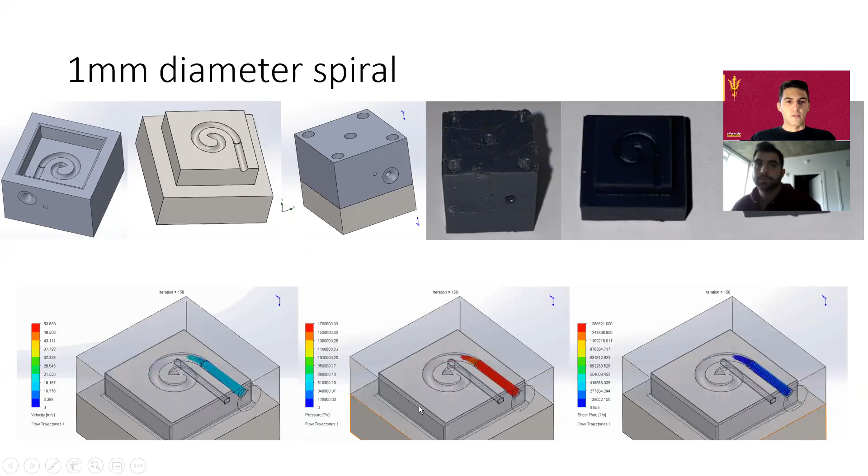And I've done that for many different types of varieties. So this is a 1 millimeter diameter spiral, and then a 0.5 millimeter diameter spiral, a human scale with a human scale clamp, eventually some blood vessels that hopefully will be implemented very soon, some capillary beds just to show ASU pride, like ASU stuff, Pitchfork.

This is my clamp that I use for all the experiments and these injection molds in general. It's modeled after an adjustable wrench. I'm not really going to go over how to do that, there's a YouTube video you can use.

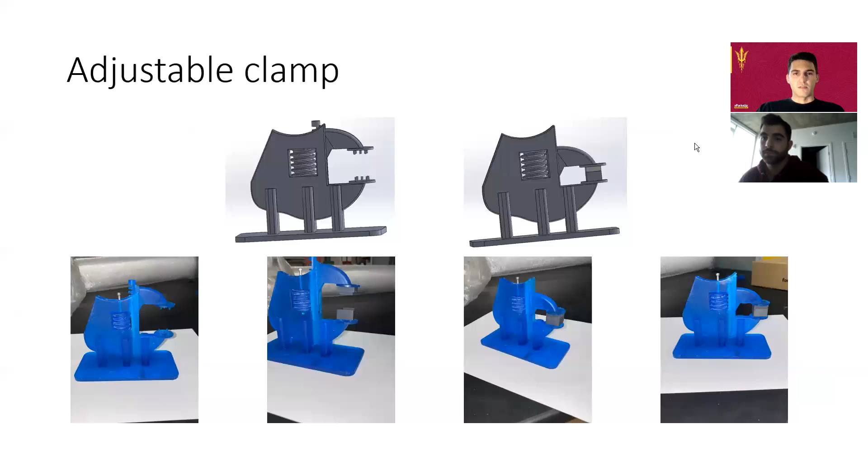I'll post it somewhere. This is another clamp that we'll be implementing pretty soon. It's a hemostat clamp to be clinically translatable. And then yeah, so that's that.

Now let's start into SolidWorks. So I'm using a 2020 version. And it's very similar to most other versions, older versions, but this part is what you're going to start off with.

You're going to use an assembly if you have multiple parts you want to put together. A drawing - I'm going to show what assembly and drawing is at the end of this, but that's basically kind of your schematic of these. Have you used drawing before, Fino?

Yeah, it's very useful. Really good for when you need specifically dimensions and everything. Dimensions and the metrics of whatever you're creating.

Yeah. So first off, whenever I do anything or start something, it's a part. And I just want to reiterate that this first video is very much just showing you what SolidWorks is. I'm not going to go over what an injection mold is, how to make it right now. That'll be in the next video, and now we'll actually have with me Jarek.

His last name starts with a G. I do not want to mess up his name if he's not here, but he's gonna be on for the next one. So whenever you start a print, or let me go through this first.

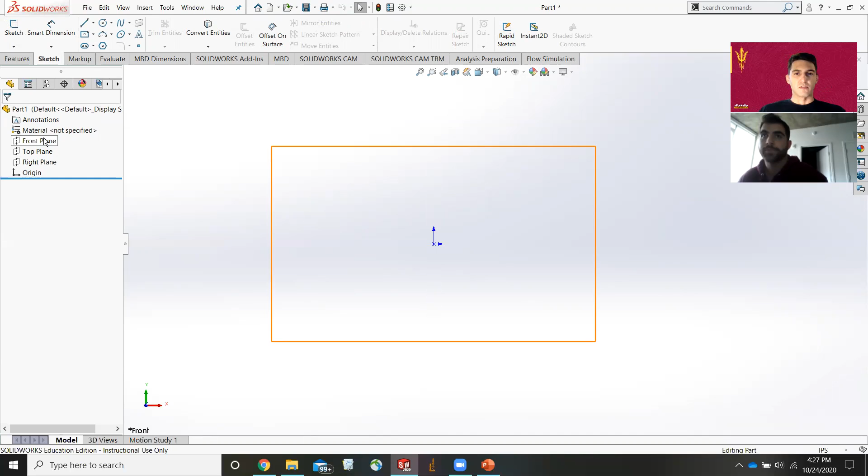So now you can start drawing on this front plane. And I just want to reiterate that knowing how to use planes and sketching on different types of planes is probably the most important thing you can do in SolidWorks.

He's nodding his head because it's very true - if you don't know how to work with planes, you're probably not going to make the desired part that you want. When you're building on a plane, you'll build up, but you can only build in one direction depending on what plane you're using. So if you're trying to make something pretty complex, you need to build in multiple directions, so you might use multiple planes.

There's also a function that lets you create your own plane. It's a little bit more complex, but I'll show that.

You also have this IPS down here, which is the first thing that comes up. If you press it, you can change between millimeters, centimeters, meters, all those types of units. I like to keep it in millimeters just because of all the small scale stuff that we make on SolidWorks.

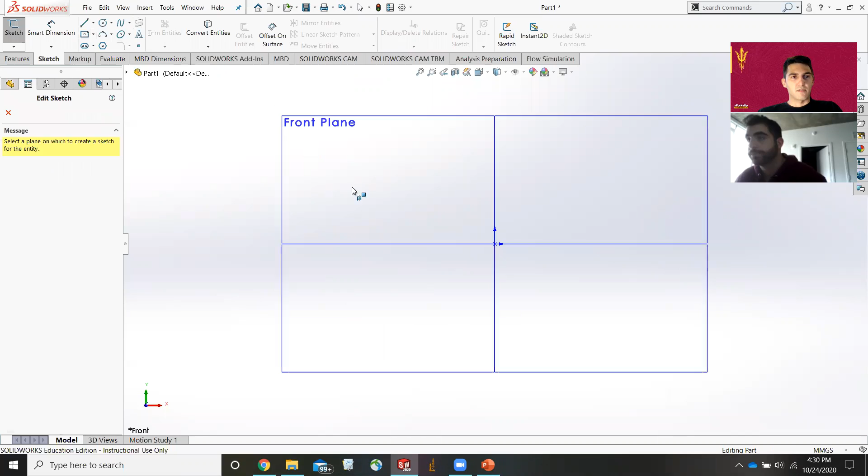But first, let's start off with a square here, a rectangle. So I make this square, and you can come into smart dimensions and make it whatever size you want. So I want 80 millimeters on that one, and I'll do a rectangle, so 100 millimeters here. Now just get out of the smart dimension.

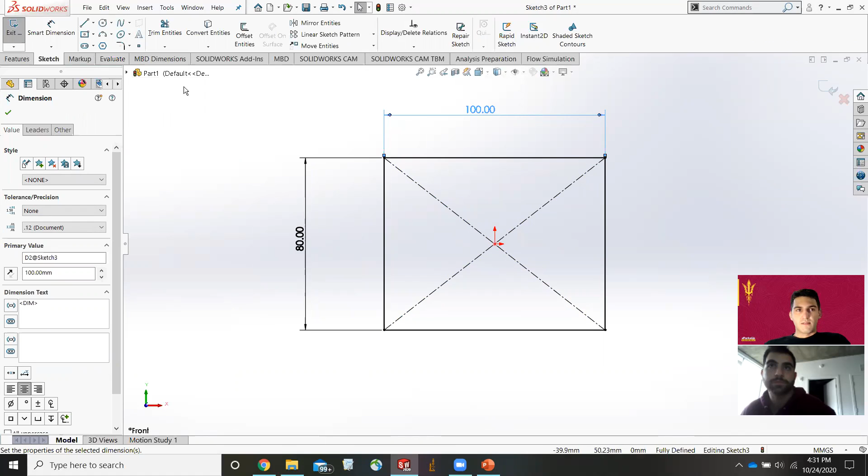And then now we can extrude this, so we come to the features tab. Our features right here have all these different types of features we can use. Right now there's no 3D model, it's just a drawing, so we can't really use any cuts or fillets because there's no 3D model. So we have to extrude it.

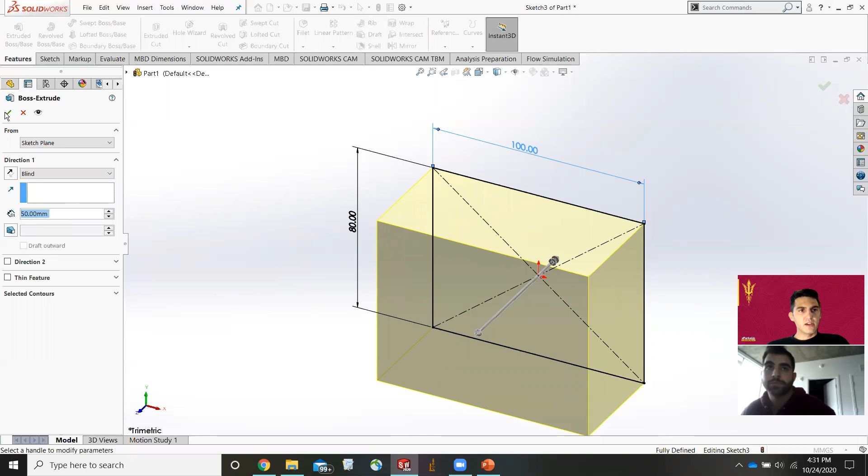This will kind of give you a preview of what it will look like, and you can move it around manually to whatever you want. But if you want something specific, you type it in on these dimension fields right here. I'll say 50 millimeters. Goes there, and there you go - you got a little box.

So what's pretty cool now is you can basically build anything you want off this box. You can fillet - you can fillet the corners, which is this button right there.

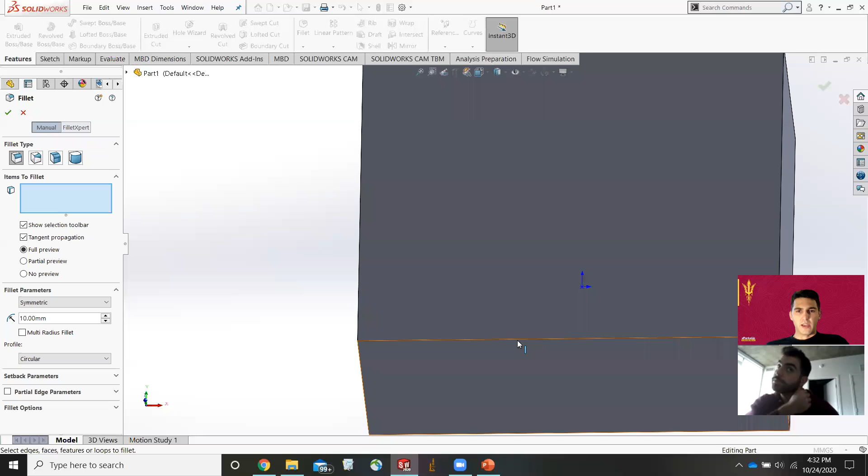There's different types of fillets you can use. You can play around with it if you want. You can take all these sides right here and fillet them, so you have all these edges. You want to show the full preview just to see what you're getting into. You can change the diameter of those fillets, so 5 millimeters, that's what it will look like. So now you have a fillet, right?

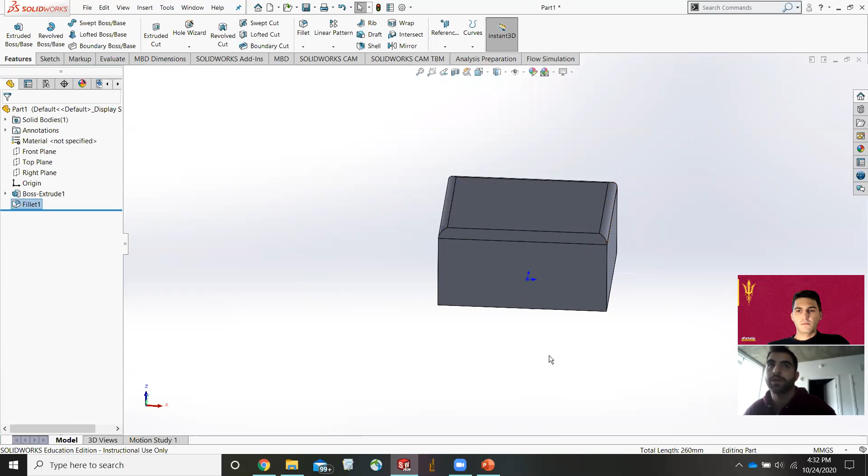If I can add something real fast, just a good mindset when you are creating a 3D structure, kind of how we said planes are extremely important. When you create a 3D structure, each surface, you can draw on each surface of the 3D structure. So you can think of it as each flat side of that 3D structure becomes a new plane, and you can draw and cut into that or extrude out of that as well. That's what happens when you have the original thing. You can do that on most sides, but once you get into more complex shapes, once you extrude off of this main one, it gets harder and you have to use more planes and everything.

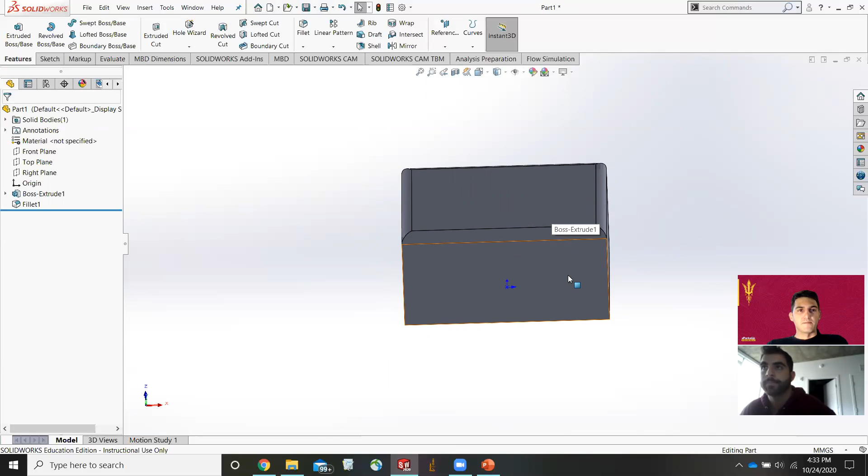It's just practice. But let me show you another cool thing. We can use this shell tool right here, and I'm going to press that. I'm going to show the preview. This is basically going to shell out this inner portion of this box, right? Instead of having to go in there and manually cut it out, you can shell it out with these dimensions here. So how about 2 millimeters of thickness for this box? It shows you the preview, and now you have a box that is shelled out.

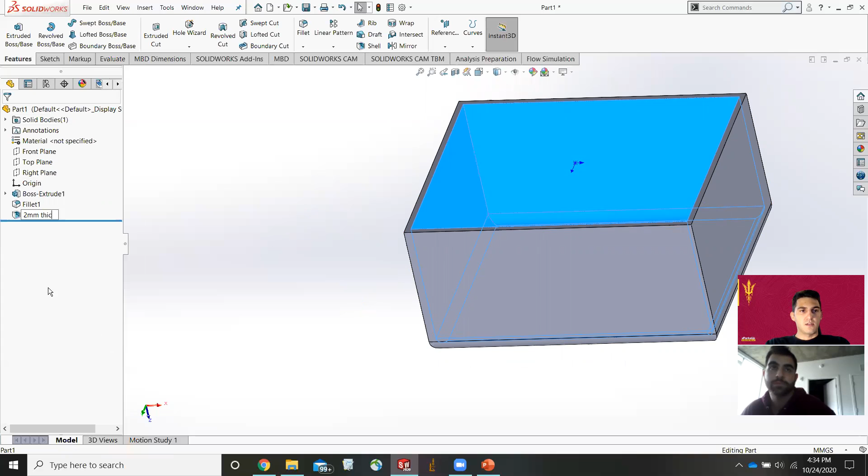And if you've noticed on the side right here, it's basically your history of what you do. You can rename it, so shell 1 is 2 millimeter thickness. There we go, whatever you want. So that's your history. You want to make sure you kind of keep control of that, know what you're doing. But I'm going to erase what I just did, and Control Z is a good way to do that.

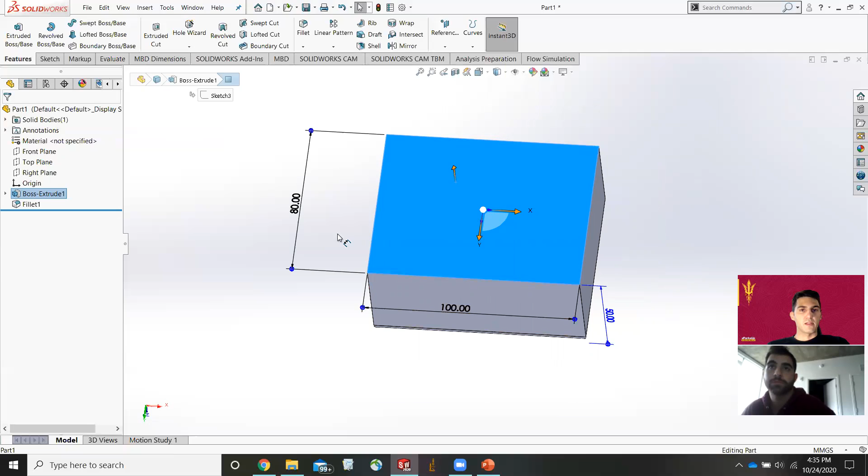Now I'm going to show you how to cut through here. Like Pino said, you can kind of build off of each side by itself. Oh, and also let me show you this up here, a good way to get a straight on view instead of having to roll it around with your mouse and try to get it as straight as possible. Yeah, to specify that as well.

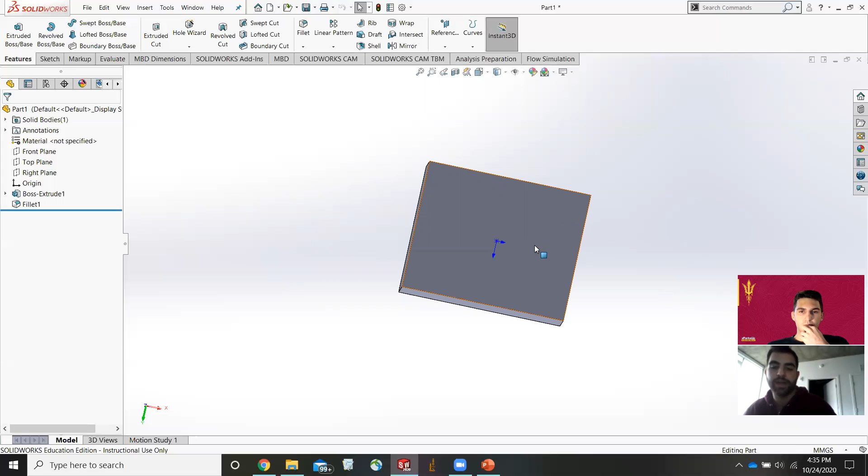Your angle you're looking at is extremely important, and also with your mouse, you'll probably notice Alec was free form, kind of moving it how he wanted to. You do that by, at least with most mouses, clicking the scroll wheel and then moving the mouse, and it allows you to move the object around. That box basically allows you to freely choose what perspective you want to be looking at your 3D model at. If you're using, I highly recommend using a mouse, but you can get away with using a trackpad, and I believe if you just use the arrow up and down and left and right keys, it lets you do the free movement around, I think.

Yeah, exactly. And then when you want to move back and forth, like in and out, you just scroll your mouse, just like you would going down on a page on a document or something.

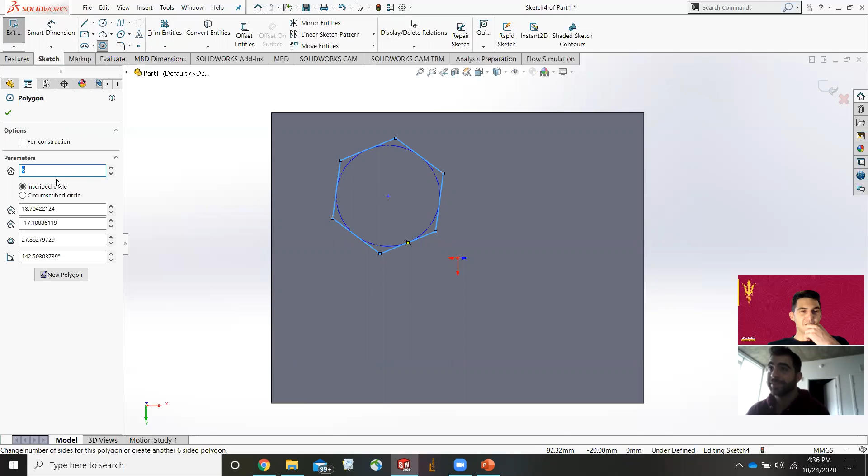So here, instead of using a regular circle, I wanted to use a hexagon. What is this number? I can't think of numbers right now. What is the six? It's hexagon. Yeah, it's a hexagon, right? Yeah. And then 7 is septagon, 5 is the pentagon. Yes, okay, I forgot. Well, we'll stick with hexagon.

So you can change the number of sides with this. Septagon, octagon, it's pretty cool. We'll do an octagon, so now it's set up here. Then we can go to your features tool. We can do an extruded cut that will go through this, or we can adjust it to how you would want to extrude it. So let's say we'll do 30 millimeters.

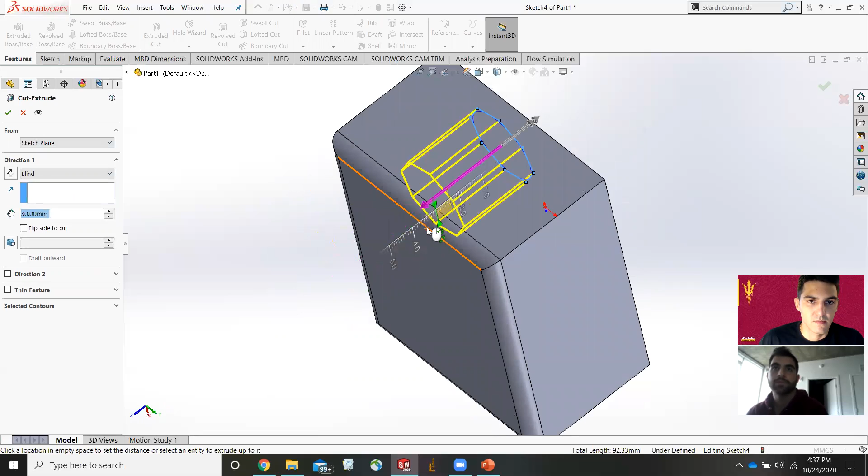We can do it blindly, so it's kind of just you taking it and doing it itself, or you can go up to the vertex, which is this plane right here, like that. Or there's other things you can do, like offset from surface, which would mean you just take it off the surface into something else. I'm not going to worry about that, but play around with it if you want.

30 millimeters cut. You now have an octagon hole in your box. Cool.

Now, is there anything else basic I should show? I'm gonna erase this.

I was just gonna say another short kind of mindset thing. I know there's so many different options, and it can be overwhelming to see all of them, like swept cut, lofted cut, boundary cut, fillets, draft, shells, and all that stuff. But the important thing to keep in mind is the main two things in SolidWorks: it's basically the whole program is extruding and cutting. All of those are essentially just shortcuts for cutting and extruding more accurately, to get exactly what you want.

The swept cut and the loft cut, that'll be very much used in actual injection molds, which I'll show more. So I'm not going to go heavy on it for this, since I'm going to show it a lot more in the actual injection molding videos.

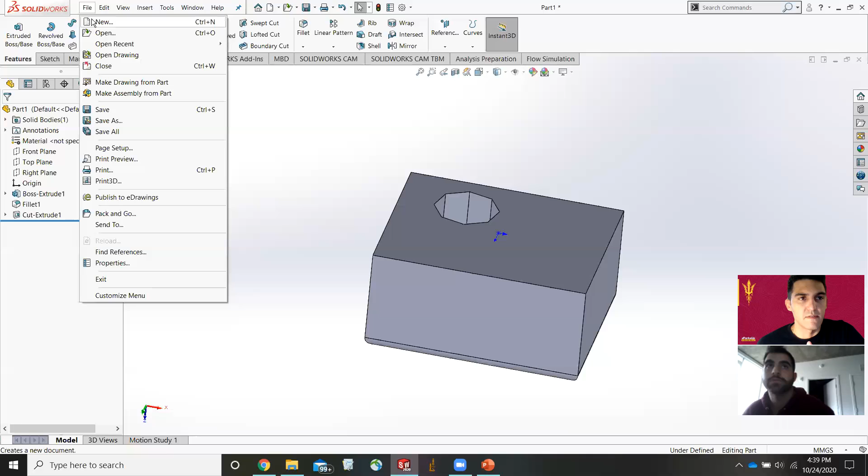I'm going to make another hole just because. Now we have an octagon, and I don't know the size of this octagon. Let's make another hole real quick. Fino doesn't know why, but I'm gonna do it just because.

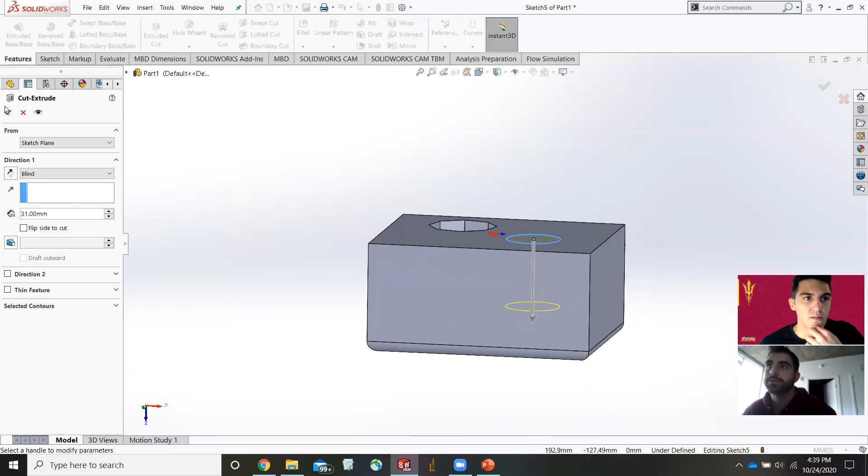And there we go, we'll do 31 millimeters. Remember that, and I also forgot to mention: always remember to use smart dimensioning if you want accurate measurements.

So let's do 25 millimeters, and then let's do an extruded cut to 31 millimeters. So 25 and 31, remember that. 25, 31. Cool. Yeah, this was nothing planned, by the way.

This is all improv. It's all improv, all improv. Yeah, exactly.

So let's do this - let's do a new part. I need to save this one. Save as... designs, and I'm going to do practice part.

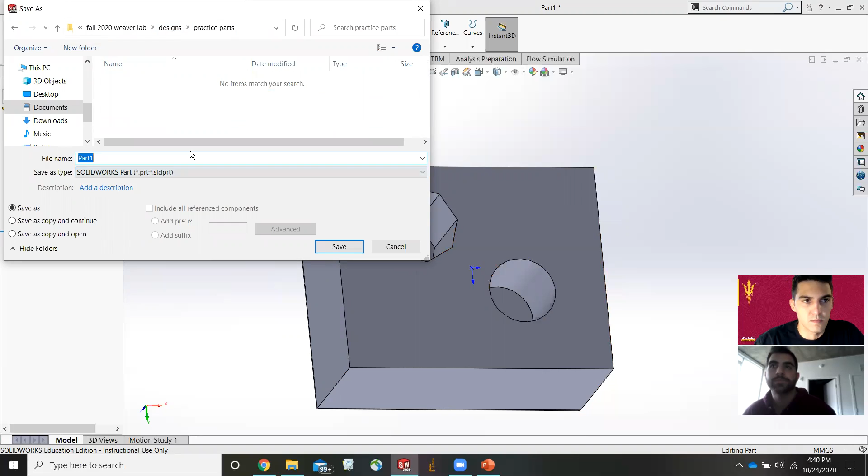Oh, I know what you're doing. I'm gonna show mating with a new part. So I'm gonna again select new part, not assembly.

Okay, so new part, so we're gonna sketch. This time I'm going to actually sketch a center line, which is probably one of your best friends as well, is knowing how to use a center line.

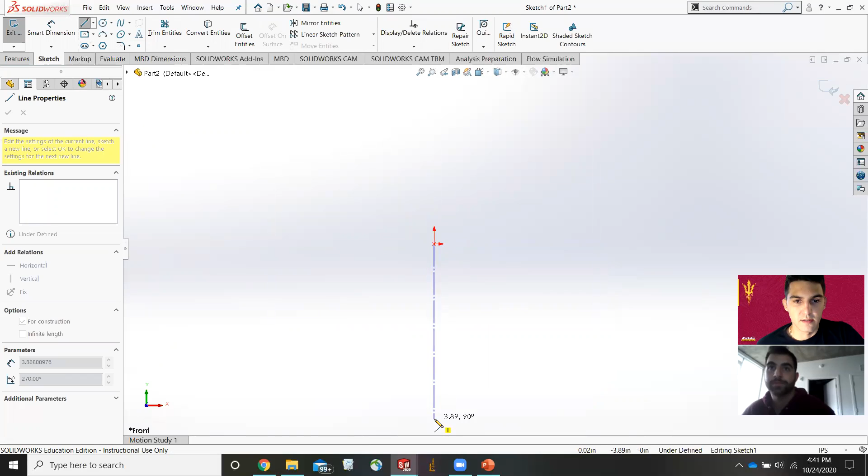And there we go, let me change this to millimeters. When this goes gray like this, by the way, all you have to do is double click and it will come back so you'll be able to work with it. If you press X, it will exit the sketch. If you press this other option, it'll also exit the sketch, but it will just make it gray, so you won't be able to really work on it.

I didn't know that. Yeah, so double click to get it back into sketching mode, and then I'm going to show you actually how to mirror something.

You know what's half of 25? That would be, oh my God, 12.5. 12.5. And then, so this is what I'm going to show you guys, which is pretty cool, I think.

This is an extremely useful tool for sure. Symmetry is pretty much important in almost every single device - I mean, 90% of devices there's going to be some symmetry you need to work with. So the mirroring tool is very, very important. Let me just show you the basic way to do a mirroring tool.

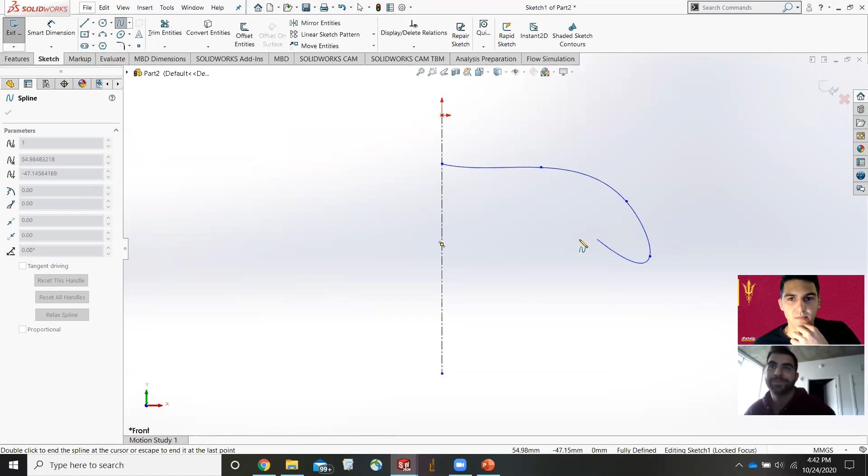So let's take my spline - you know Fino hates splines - and kind of make a weird shape. So how does that look, Fino? I don't know what it looks like. Kind of looks like a ghost, like an upside down ghost with eyes right here. It's October when we're recording. Yeah, exactly, October 24th, so we're going for spooky.

Yeah, so this little screen sharing thing up here is in the way, I can't really see what I'm doing. So I'm exiting that sketch - just kidding, I'm gonna keep it in. Why isn't it doing this? See, I told you, splines.

Hold on a second. Okay, this thing up top is so annoying when you screen share. I can't see what I'm pressing.

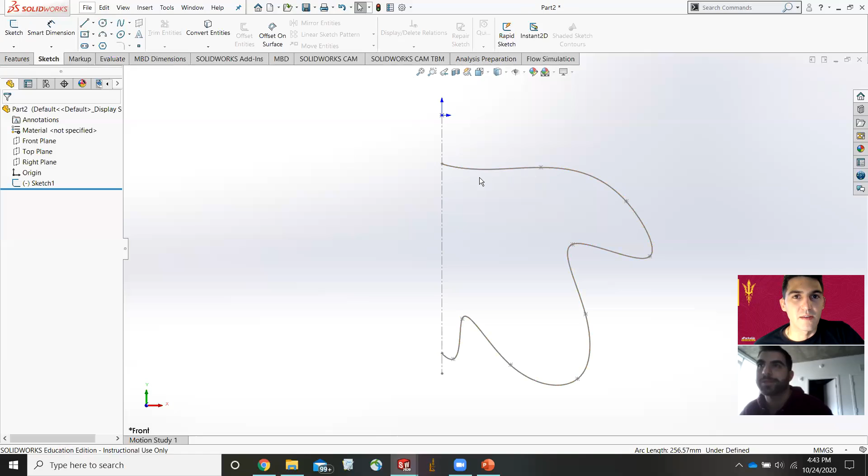Let's mirror entities. Here we go, we mirror this about this line. See, now it looks like a... what does it look like? A bat? No, an ugly butterfly, a fat thick butterfly. Anyway, so you can mirror. If it's something complex and you don't want to freehand matching the other side, using this mirroring tool actually helps a lot.

So we have now a completed thing that you can extrude, just like that. Does that make sense? It's cool, now you can work off that.

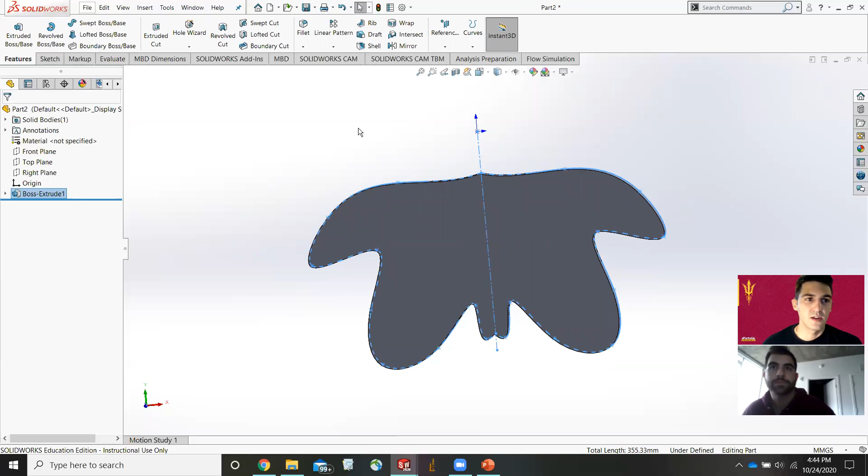So again, I'm going to go backwards and delete this. I'm going to show you something that you don't have to do, but it's pretty cool. It's a revolved boss base, and for the mate we're about to do, you don't need to do this complex thing, but we're going to do it because it's fun.

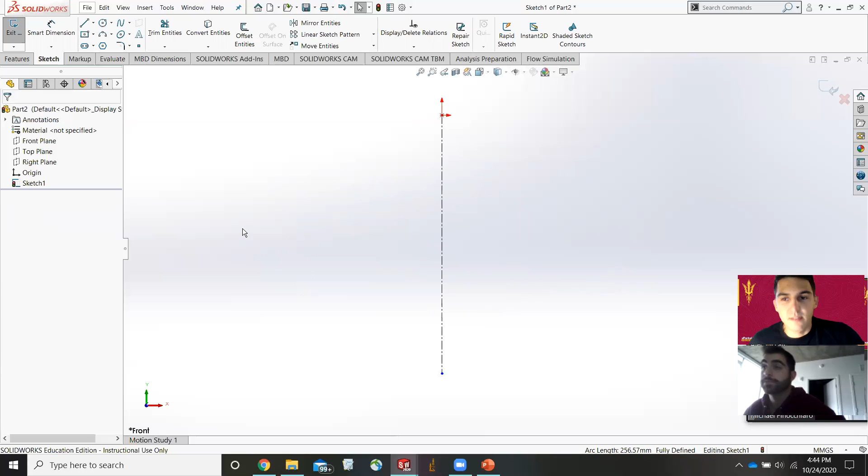So now we're going to take our line. What was the diameter? It was 25, right? 25, and the height was 31. Okay cool, so I'm going to go here, just bear with me. 25, I'm going to do 40. So then, smart dimension, do 40 millimeters, and then I'm going to go down.

Sorry, I'm bugging here. And then I'm going to go back across. Actually, I'm going to make another one. One cool thing about Solidworks is it kind of tells you where points are when you're on another line, where to start, and it'll be accurate, so you don't have to worry about measurements as much. But here we go.

So now that's over. Smart dimension, 12.5, right? Yeah, millimeters. Cool.

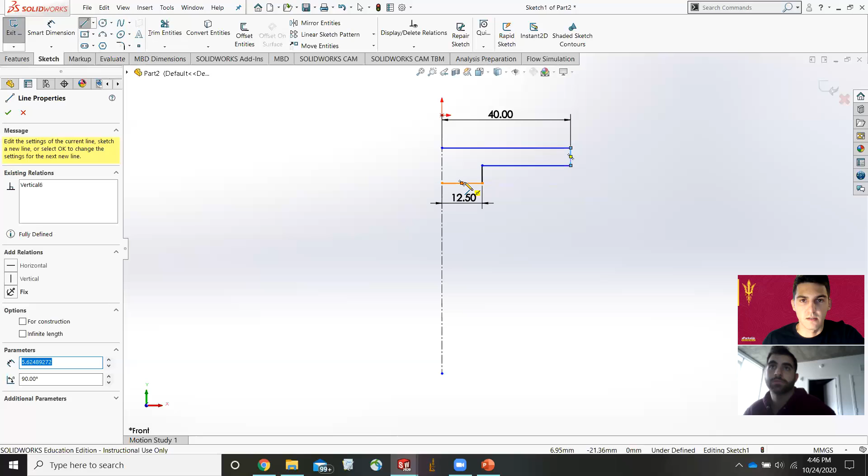And I'm actually going to delete this real quick. And actually, I'm going to delete this again. And make this 31. 31, right? Yeah, 31.

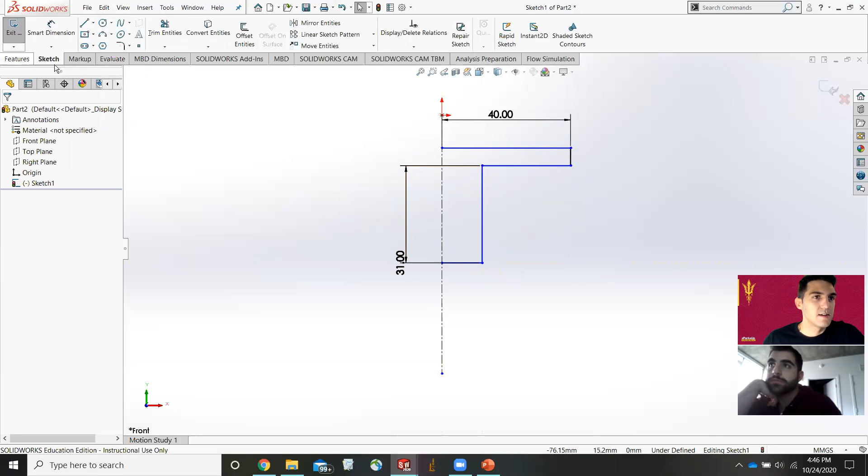So this is pretty cool, I think, hopefully you guys like it. Is this revolved boss base? And then we actually have to... oh yeah, there we go. So look at that, it's like kind of a lid, right? It revolves around this sketch around that center line. So that's exactly what we want.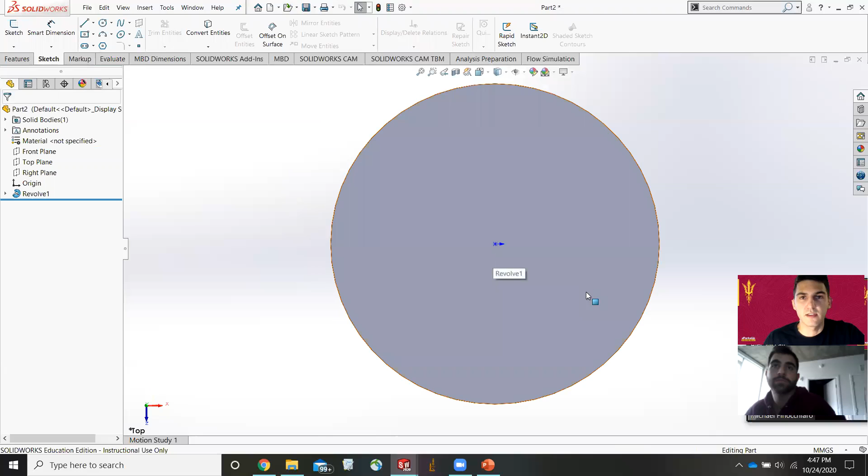Pretty cool, right? So now we can actually build off of this plane again. Let's do this, I'm going to make a sketch on here. If this is getting too complicated for people, let me know. No, I think everything has been pretty easy to follow.

Okay, so I'm going to sketch on here a circle. Okay, bear with me, bear with me. And then I'm going to draw a center line here to here.

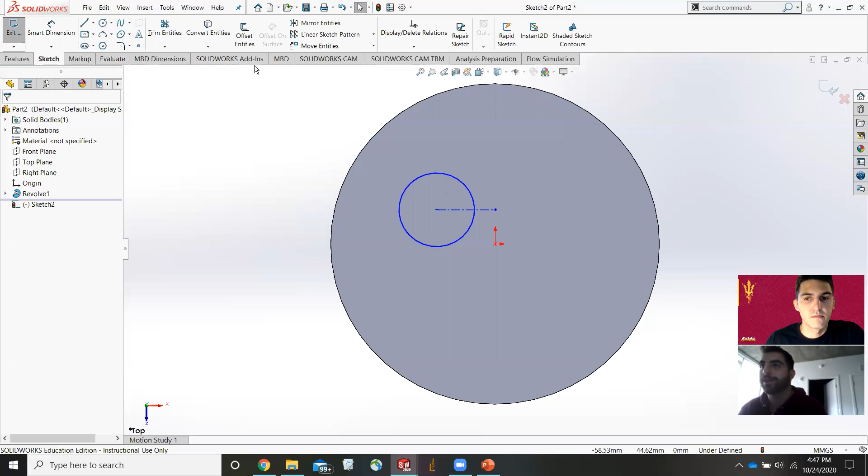Quick note, if you're having trouble figuring out why your thing is not extruding, check for extra lines that could be going into your 2D shape. They might be hidden, something you forgot about. Just check for that, because you need a completely enclosed 2D object without anything going in or out in order to properly extrude. Just wanted a quick note.

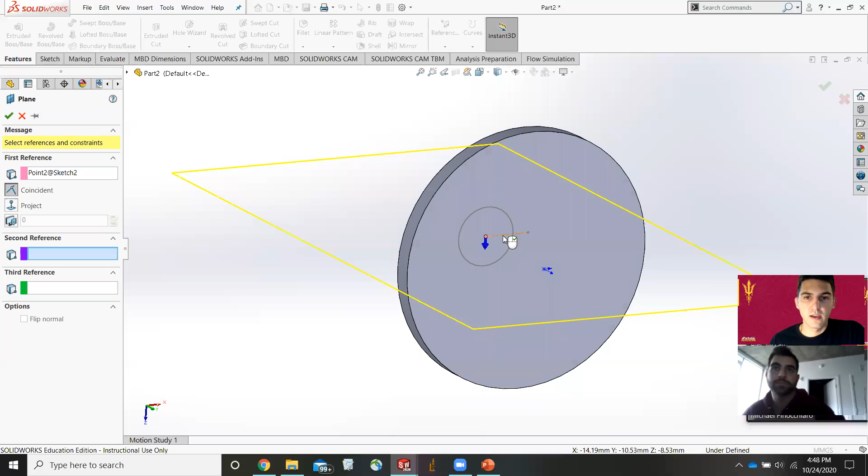So now I'm going to make this, this will make sense of what I'm trying to do with this line real quickly. Right now I'm not going to exit the sketch, I'm going to press that button to make it gray, so I'm able to hit reference and go to plane. You need three different references to make a plane; I'm going to use two, using this point and that point to make a plane. See how it's making it right there in this plane. You can make it bigger or smaller, whatever you want. But what I'm trying to do is make a line.

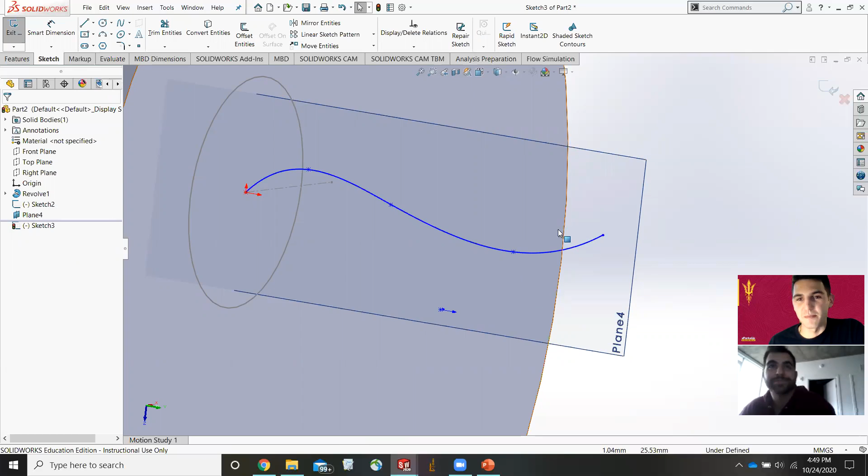Let's use our handy dandy spline tool again. How about that, another spline tool for you? You don't like the spline? I don't usually like spline, but whatever. You use the spline, it's fun, I promise, when you're actually good at it. I love making the blood vessels and stuff because you don't have any measurements, you can just freehand it, it's pretty fun. The artistic juices are flowing, you gotta have the creativity going. I want to make another plane.

Like I said, we should make this a podcast, doing SolidWorks and conversations. I bet that'd be fun for engineering students at least. Yeah, there's a lack of good engineering podcast content out there.

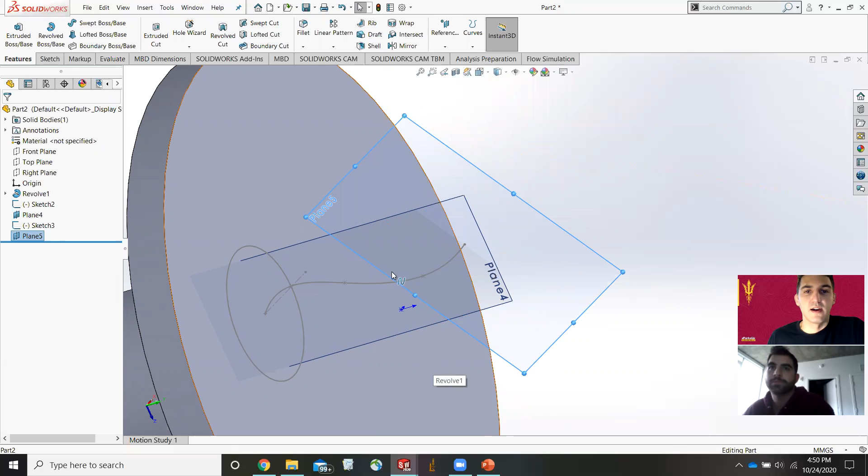So you see how these planes are kind of becoming more and more planes, and that's what you need when you're making something that's extruding off and you want to build something. Basically, you might not have a flat surface to build off of, like this how it's angled - you won't be able to build something off of that. So you need a plane, and you can press on whatever plane you want.

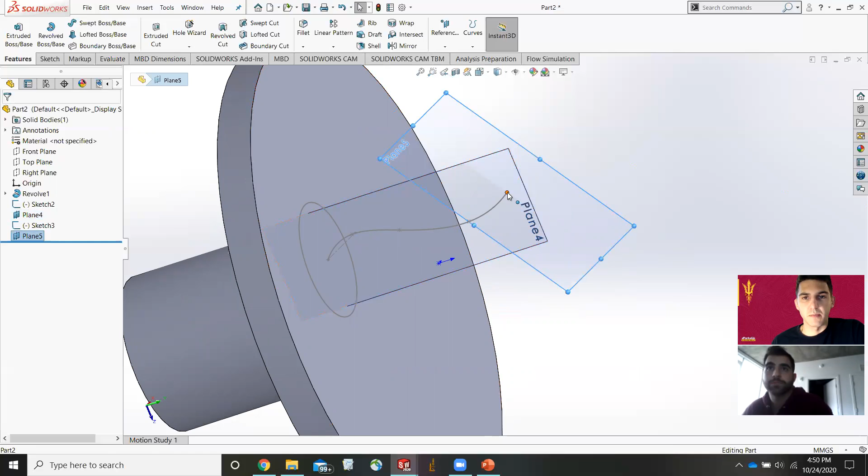Right now I want to build off this plane because I want to build off that dot. I'm going to do a sketch. Let's do a square. How about a square? Does that sound good, Fino? Sounds great. Love squares.

Anyways, I had a joke and I forgot what it was.

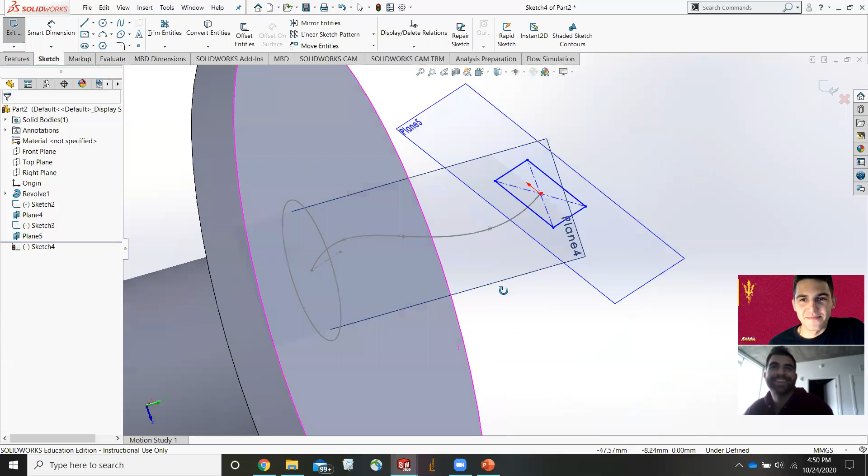Anyways, now we're going to try a lofting. So you don't want to do a cut because we want to build something, right? So we want a lofted boss base. Profiles.

Okay, I'm going from this square to this circle. So you've got to press both of them, this square to that circle. You see how it kind of goes - you're going from this square shape to that circular shape. It's not really compatible with this line that I made, this spline.

So we have a guide curve that I'm going to press right here, and I'm going to hit this line. Look at that - it looks weird because look how it's off-centered like that. So there is a way to fix that.

Start and end constraints - I think it's around here somewhere. Well, you can figure it out. That's one thing about these, it won't be right in the middle, and you have to adjust it.

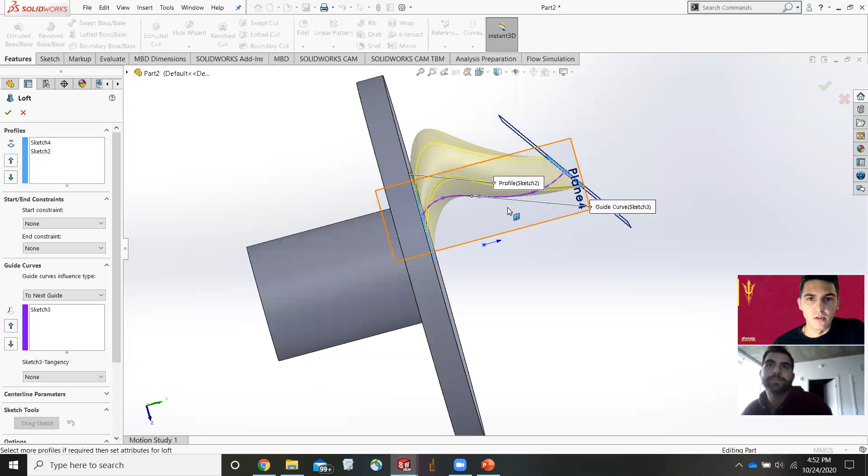Essentially, you're using that as a guide to that line, from one to the other. No wait, just kidding, no, kind of. No, next edge, next. Somewhere in there.

As you can see, there's a lot of trial and error in SolidWorks, and you just kind of got to play with it. But we're going to do this.

Intersect the section plane. So sometimes you get errors like these where it doesn't even let you build it because, like Vino said, spline is hard. It works when something like this isn't complex.

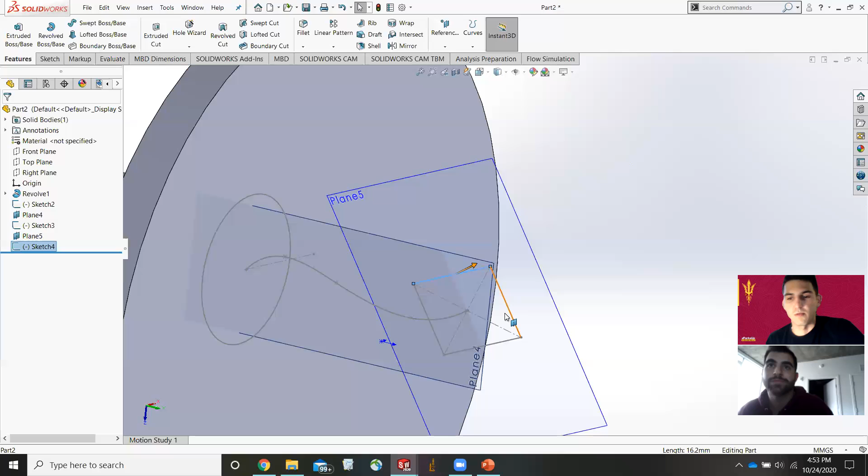So I'm actually going to take this square off because I just want to show you that it works. It's pretty cool. I think an actual regular circle should work.

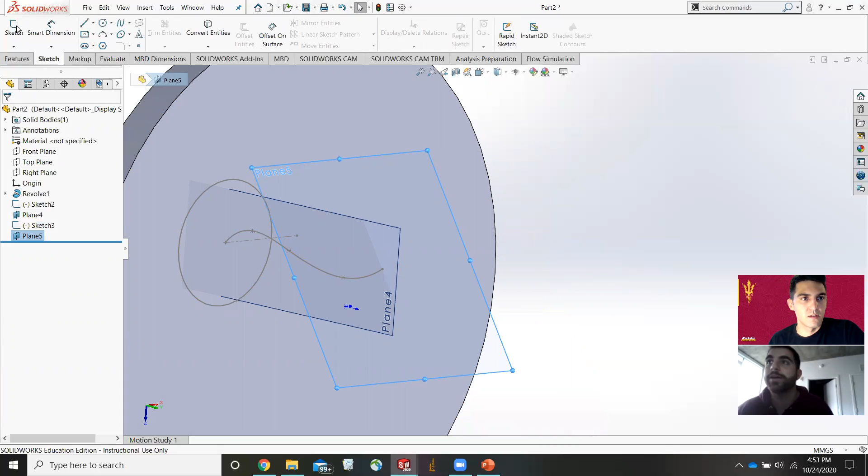Oh no, you built that on the wrong plane. What happened to my plane? There it is. All right, make sure you're on the right plane. Also, if a plane disappears, you can always go up to the menu on the left side, find it, click it, and then it should highlight it on your actual thing.

So again, let's try this profile. Circle to circle - look how it kind of does that. Now our guide curve, this should work better just because... maybe not.

So what are you trying to do? I just want to see if that works. Because the spline is technically getting in the way of it, or? Yeah, something like that, it's just being annoying.

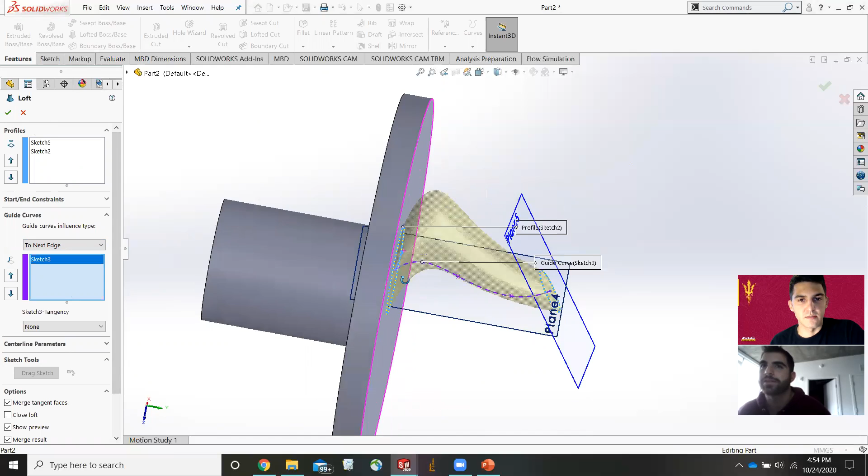But this is pretty cool. I apologize for this one not actually working. The essential purpose of it is it allows you, if you have two 2D shapes and you want to connect them, you use that tool and it will extrude and connect both of those shapes.

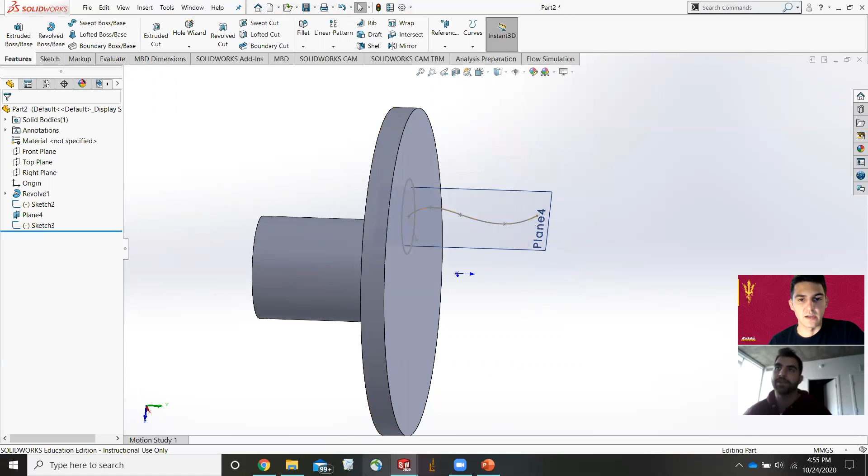And that's how I made these blood vessels, like I said. So it is possible. Oh, it's hard to see. In here too, same thing.

We're using lofted cuts though. Yeah, I was doing lofted cuts. It's the same way, so that might be why, maybe. It could be. But lofted things are definitely interesting because you have a lot of parameters that work together. It worked well with the lofted cuts on these injection molds.

So anyways, let's do our mate and we'll call this one a day. How about that, sound good? Sounds great. Am I missing anything on these, do you think I should go over anything else?

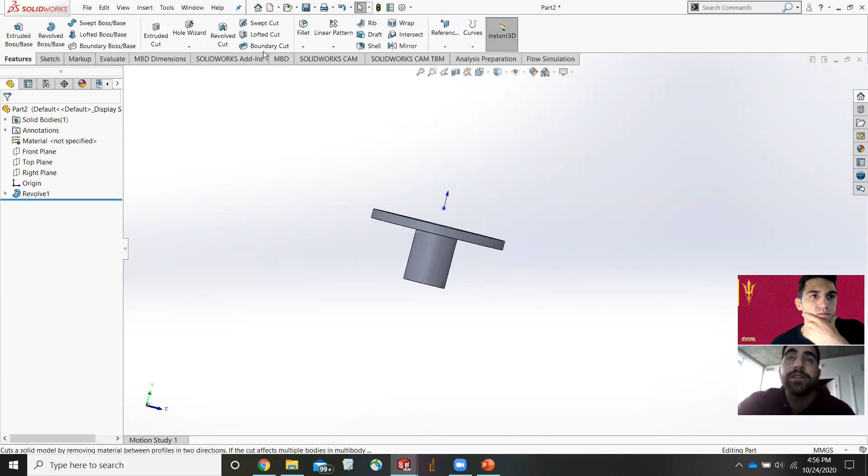No, not really. In terms of basic things, there's still a lot I've never used before, like Hole Wizard. You don't have to use it, but you can. Swept Boss/Base I've never really used either. Oh wait, actually, that's what happened. I've got to do this now. I've never used it before, so I couldn't tell you.

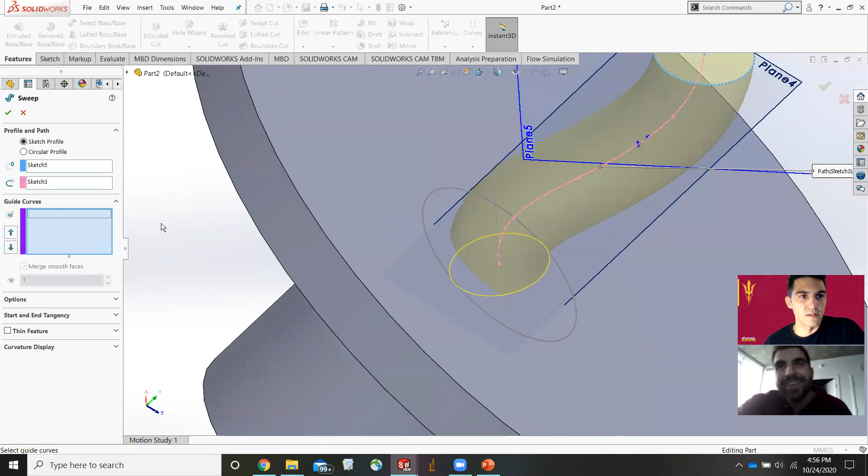Oh, that's interesting. So there's a way to connect that with that, and it's probably something for like a flush mate or something. Oh yeah, let's just do that. How about that?

Again, like I said, a lot of trial and error, or like Theo said, at least a lot of trial and error. Let's try it, let's do this.

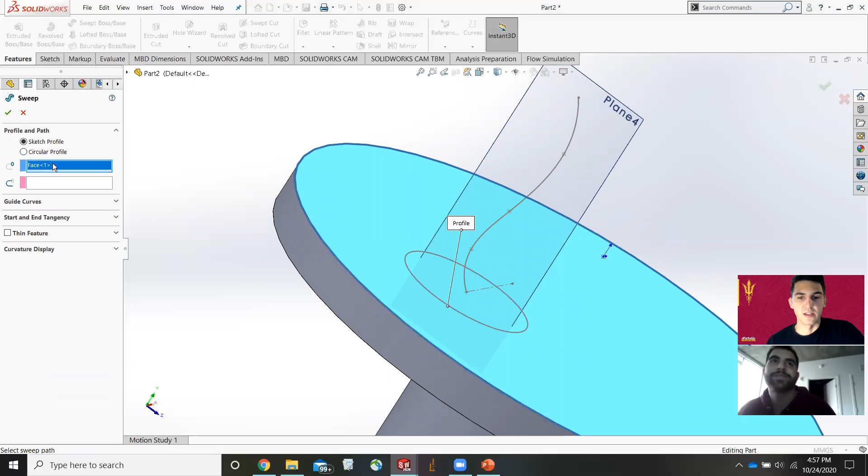One last thing, I promise. This is what you have to use for building these injection molds. By the way, I wasn't going to get into this today, but we're here now, so it's okay. I bet they don't mind, they're probably watching us at 1.5 speed right now anyway.

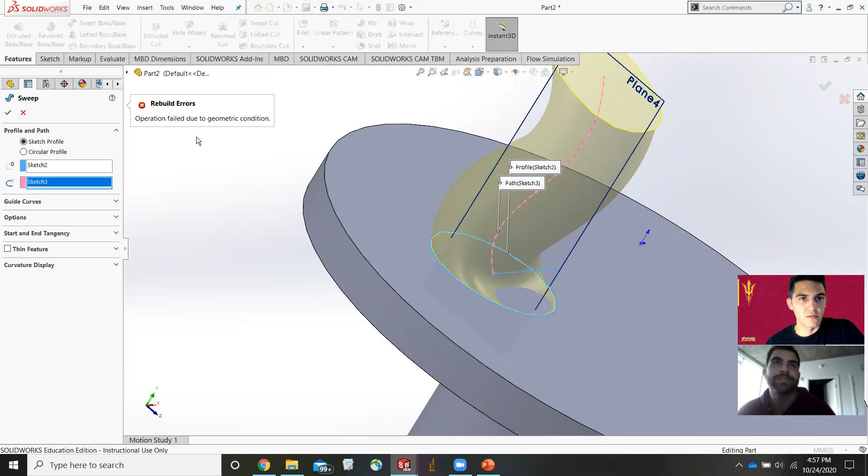Why is it not doing this? That is very weird - operation failed due to geometric condition. Oh, I think it's because of this thing right here, it's because it's going in. Yeah, whatever, but I'll show you in the next video. It'll be fine.

All right, let's go on to the assembly. Like I said, this was all not planned, I had nothing really planned for this, it's just going. Okay, let's save that.

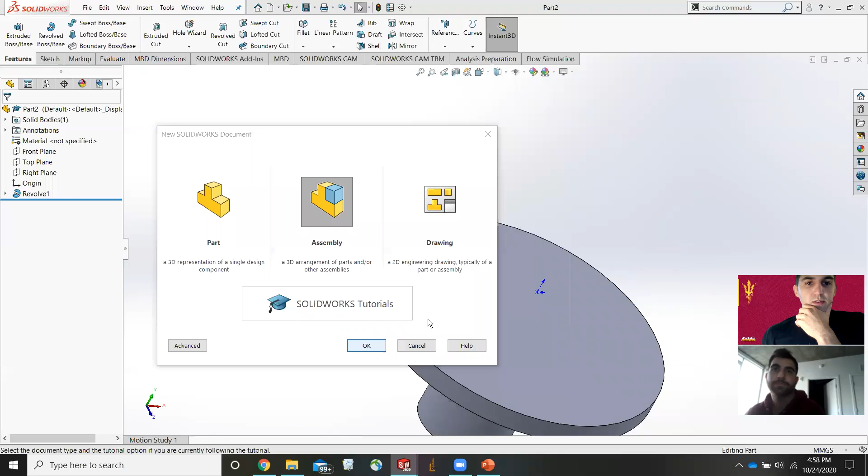Part 2. Cool, now we're gonna go to File, New, and click Assembly. Now it'll be a little different.

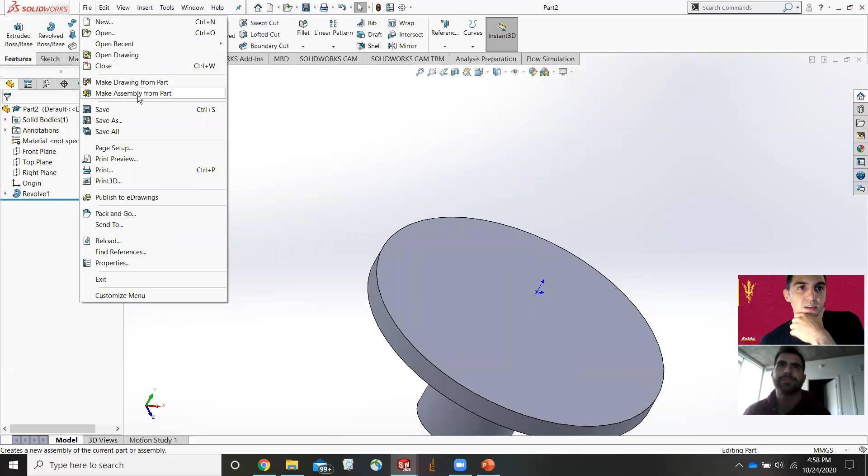Wait, where is it? Did I click Assembly? No, I guess I clicked Part on it. My bad, because you wouldn't have Evaluate and those other options unless you had. So, Assembly - or you can do this: File, Make Assembly From Part. That's also easier.

So it'll change up a little bit. Now it'll say Assembly instead of Features or whatever it was. So now we have Assembly right here. You want to go to Insert Components, and we have Part 1 and Part 2. You're basically just going to drag it out. Got our holes right there.

Now I'm going to insert components again, going to Part 2. So remember, our front plane was built on this one right here, or somewhere around there, and that's why they're oriented differently.

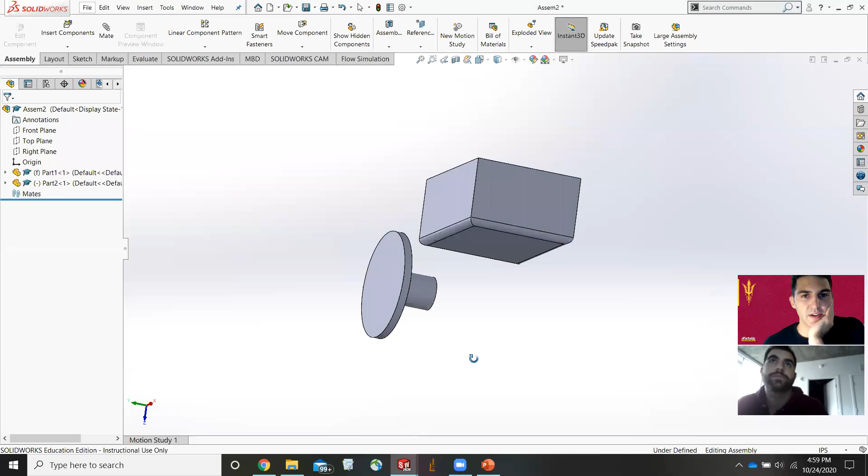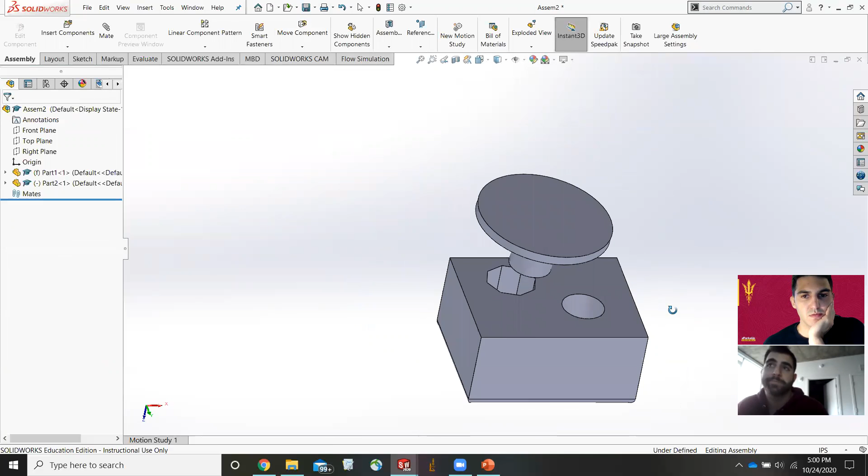But you go here to Move Component, you can rotate the component right here, just like that, to make it line up a little easier. Otherwise you can just move the component itself, like up there. Now I want to put this in that hole - it's called a mate, you got a mate.

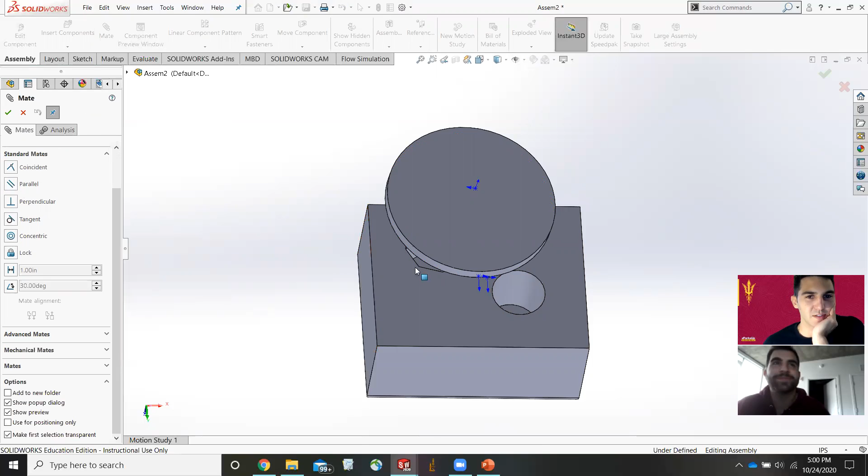Probably not the most PG thing - yeah, I was gonna make some jokes there. I think I'm not gonna make any jokes about it, but who knows who's gonna watch this. I don't know who's gonna watch this, you don't know if you're gonna watch this.

So yeah, okay, we're going to Mate. Well, what's going on here? There we go, so we have our mate selections. I'm gonna press this line, or this circle edge - they're called edges - and then this one right here. Look at that, they match up perfectly, and now it's basically a lid.

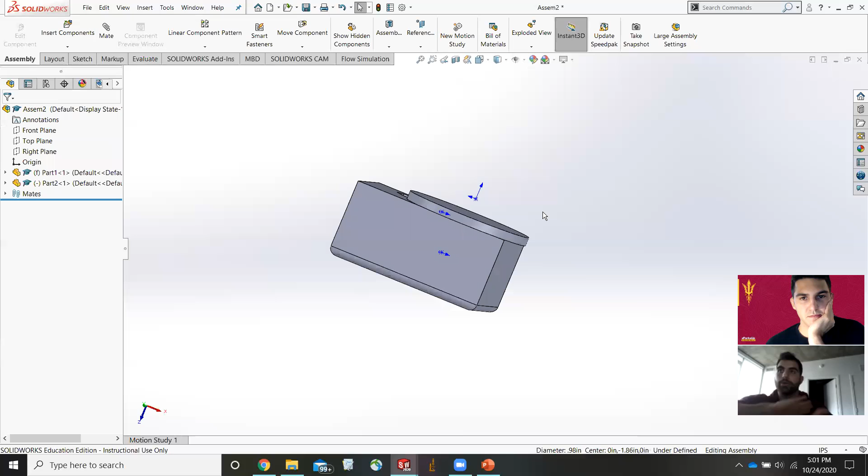You can do it multiple times with many other things, but right now that's the very beginning. You can do that with not only edges, but also with the whole flat plane as well. When it's not explicitly a hole you're trying to mate, and it's two flat surfaces, you might need to use not only the edges, but also the plane itself.

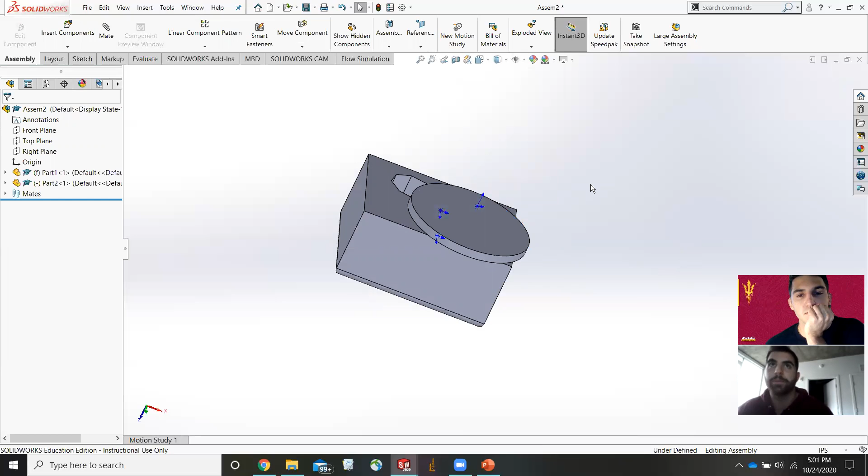But yeah, those are just things you need to play with. So the cool thing about this is now it is officially attached.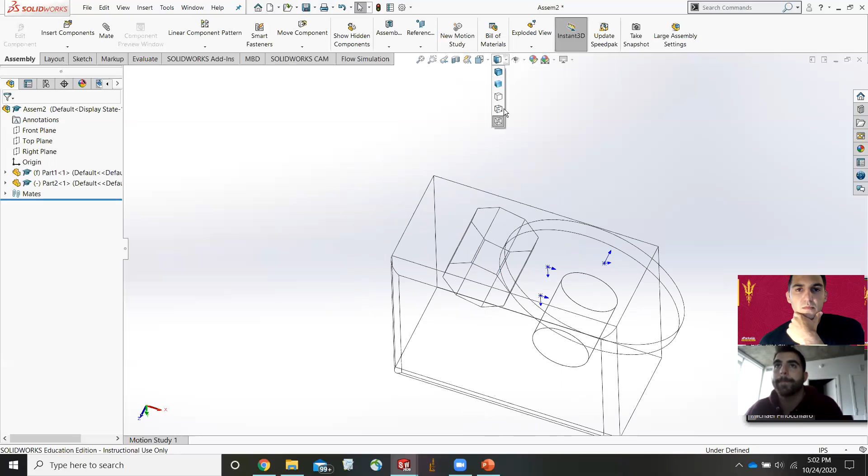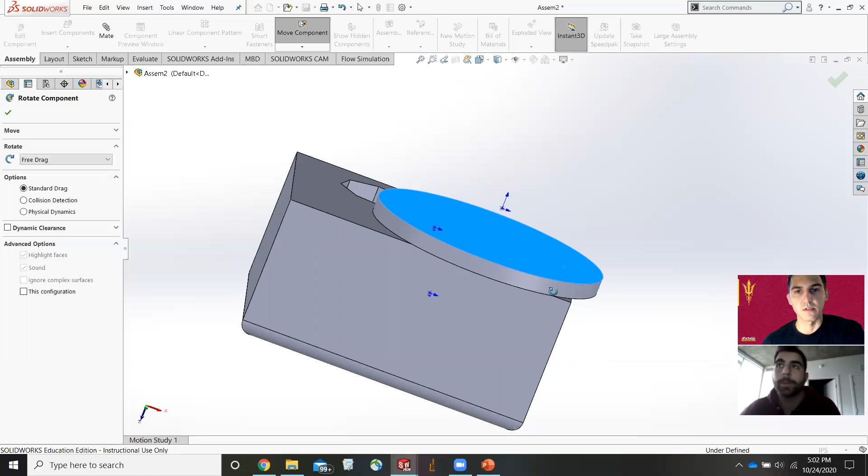So actually, this is a cool thing to show. On the inside, you can see that it's mated right on this edge, so you can't move this piece anywhere off those edges now. But you can rotate it. What I was doing earlier is I can rotate this around. It's hard to see on this one, let me switch that around after this. As you can see, this arrow thing, you're actually able to move this around. So that's something to keep in mind when you're doing this.

And then another thing before we get off, is you can show a cross-sectional area of these pieces by just doing that. Now you have a bottom piece of that. You can click out of it and it'll go back to your regular view. And then this eye button will kind of take off all these center things.

Again, whatever you want, doesn't matter, you can change colors just like this. You want to click a piece - how about that piece right there - and I can make it blue. Sound good? Well, now it's a blue piece.

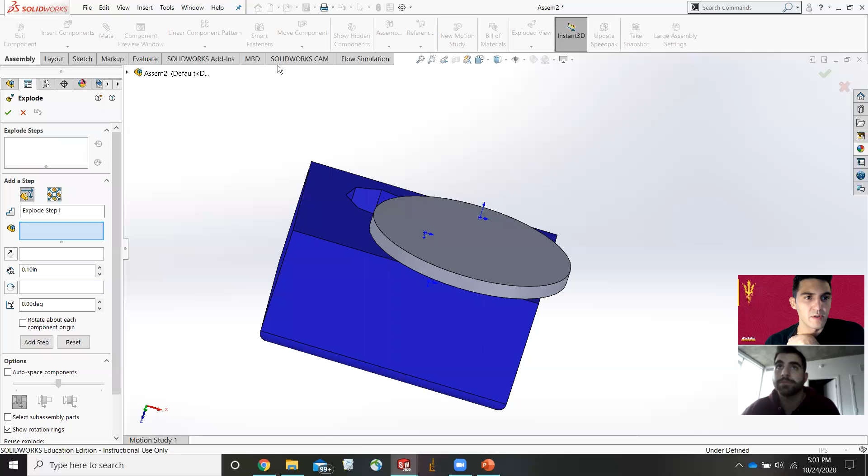And then another cool thing before we go is an exploded view. I want to take this piece right here and explode it on the z-axis going up. So now it's still on that center line all the way to that edge. But if you want to see what's going on in there, if it's a bigger piece, you can explode that out. And then you go back to the explode view and it'll just go back to itself.

That also helps a lot if you have a lot of different mates going on in one central piece. Then you can explode everything and see all the components in a big overview.

I'm going to show, on the later videos, like my adjustable clamp and stuff - everything you can rotate around, basically have it working like an actual physical piece. It's really cool. I'm not going to show how to do that, I'm just going to show you it. You can always look up videos, I'm not going to go through every single SolidWorks tutorial here.

But this is mainly for Weaver Lab, and hopefully this is a good way to get started for this video. So again, you want to save your...

Yeah, so this is all impromptu. The next one will actually have a plan, and we'll be going - I'm going to go over how to make a 2mm diameter spiral. And do you want to do the drawing really fast?

Oh yeah, so the drawing you can do for each individual part itself. Same thing - instead of making an assembly from a part, you want to go from a drawing from part.

And you can do different types of landscapes, basically showing you how big it's going to be. I like using A3, it's kind of a good mixture. You can see these letters and you can see all that.

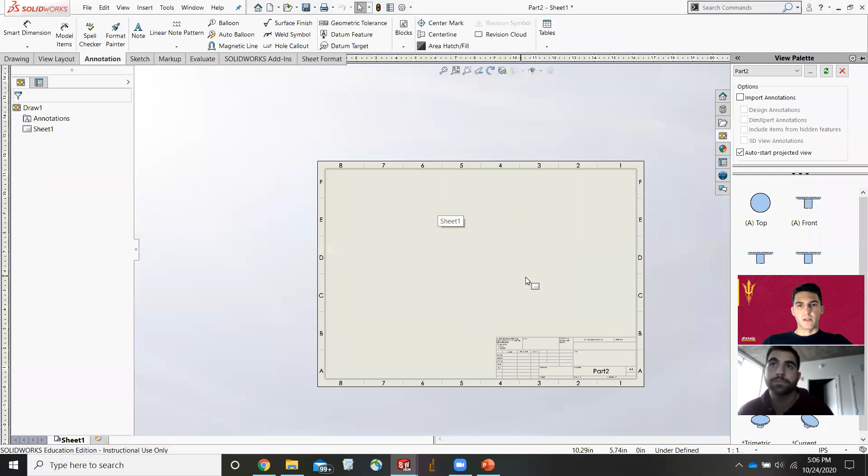So now, same way, I'm scrolling back and forth on my mouse to make it bigger and smaller. You basically take any of these pictures here and you can drag and drop. And if you move your mouse, it'll show you the bottom, this will show you the other side of it. It's the same on each side, so it doesn't look like it changed much.

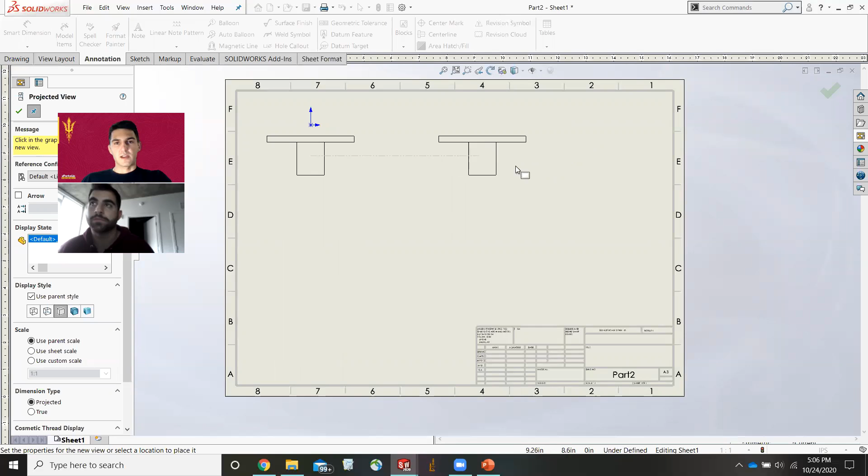And this is more of a projected view. You just click, and then press escape, and you don't have to keep doing it anymore. If you want to edit all these down here, I'm going to right click to edit sheet format. You can go in closer, double click, and you'll be able to edit.

From SpongeBob, remember that? The adult SpongeBob, like, hi, how are you? Hi, how are you? Yeah, anyways.

Make it lively in here. It's a party now, right? Okay, yeah, there's your drawing. You can save it as a PDF, or you can take a screenshot of it. PDF will turn this white, so in case you want that.

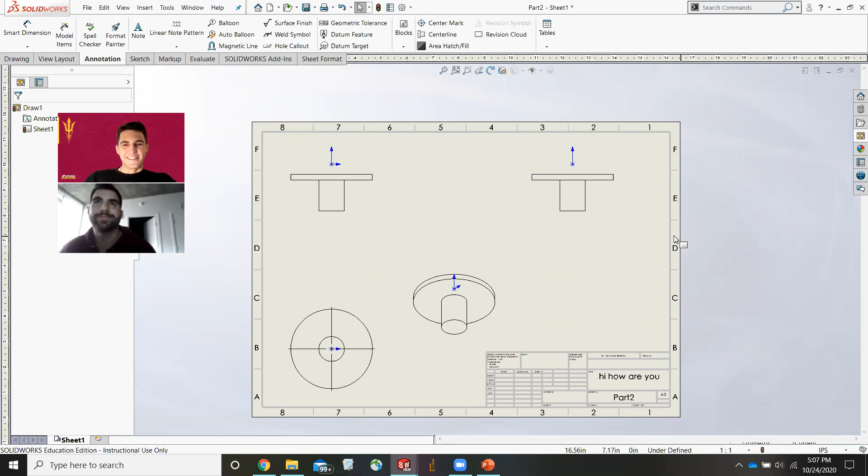So I remember doing these patent documents, and they were specific, like, can you make this a white background, please? And Dr. Weaver told me that, and I was like, yeah, that's fine. I mean, it's the same thing, it's just white.

Again, you can use these eyeballs to take things off, but be very particular on that. And then using Smart Dimension, you just do it all. You can still use Smart Dimension for things. Again, you want to change the IPS to MMGS, which is millimeters, and then we'll change that.

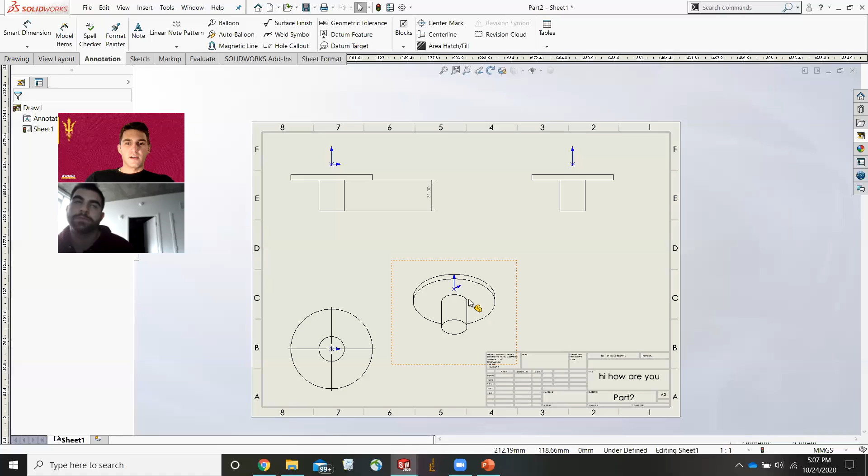Yeah, so there's a drawing. Again, you can save it as whatever you want, and then you can save it as PDF, JPEG, whatever you want really. So, drawing of part 1. Cool.

So that's very basic, going from our 2 parts to assembly to making a drawing. You can also do a drawing of this assembly itself, which is useful for the very end product. But going from each part to a drawing to assembly, I hope this was kind of helpful. I hope I didn't really miss anything too easy.

Curves is what you're going to be using when you do a spiral. So this helix and spiral thing, I'm going to show for the injection mold, which I said I'm going to go over, the 2mm, how to make a 2mm diameter injection mold. My thought process of making different injection molds, all these different types, should work for whatever you want to make. And then I'm going to go into flow simulations of the velocity, the pressure, the shear rate of all these different ones. Hopefully my computer doesn't crash when I do it, because it's a lot of power going through at that one moment, especially on Zoom.

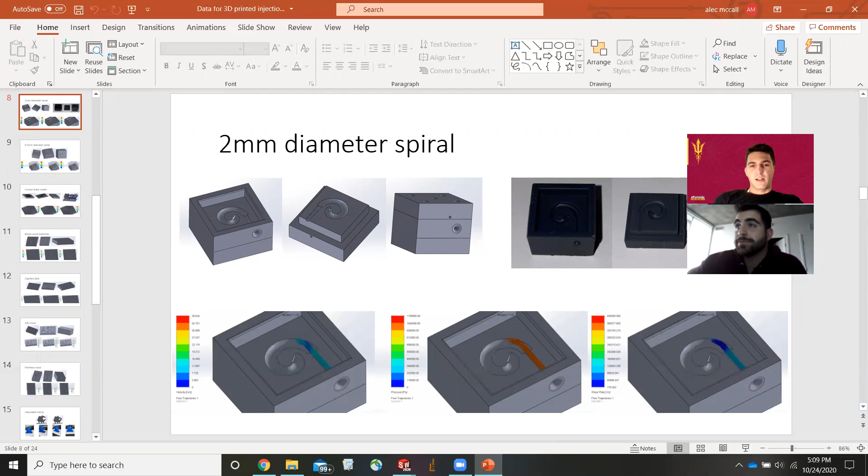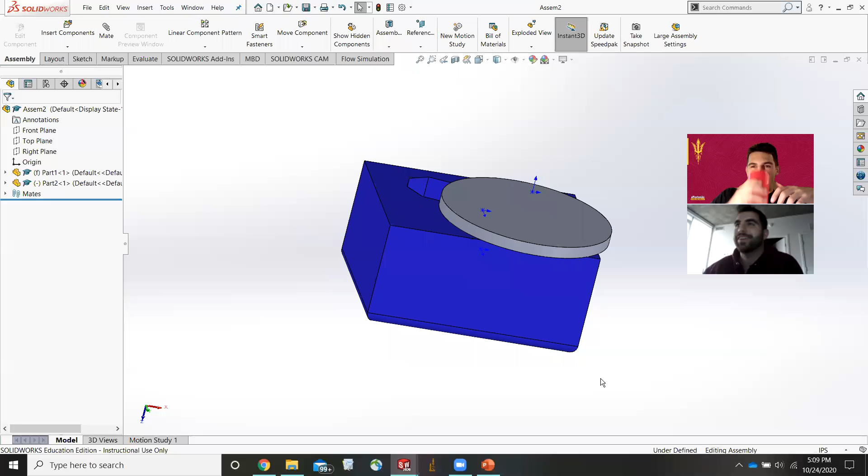So yeah, I hope this was helpful. Theo, any last remarks? Yeah, I mean, there's what's the term, a lot of ways to skin a cat, or like, yeah. Is that it? I don't know. Anyway, there's a lot of ways to skin a cat. That there's, for the most part, a lot of shortcuts.

And you could do, with the most basic of basic SolidWorks knowledge, make a very complex shape, as complex as anything me or Alec could make. The difference is how long it takes you to make that shape, and utilizing the different shortcuts and tools, because you can do almost anything with just cutting, extruding. I mean, you can do a lot.

So yeah, once you know all the tools, like how to use all these features, that's all you're gonna need. And then of course there's more, like you can go to insert, go to features here, and there's a lot more you can use, like the flexing, the wrapping, I've used that a couple times. Scaling, that's actually really important if you're taking something from off the internet and you want to make it a certain size, you have to scale it to the correct size. Splitting, intersecting, again, these are everything.

Oh, threading, if you want to make like a screw and a nut and stuff, you got to use this threading tool. And there's just so much you can do, and I hope that this was helpful to kind of show you where to look.

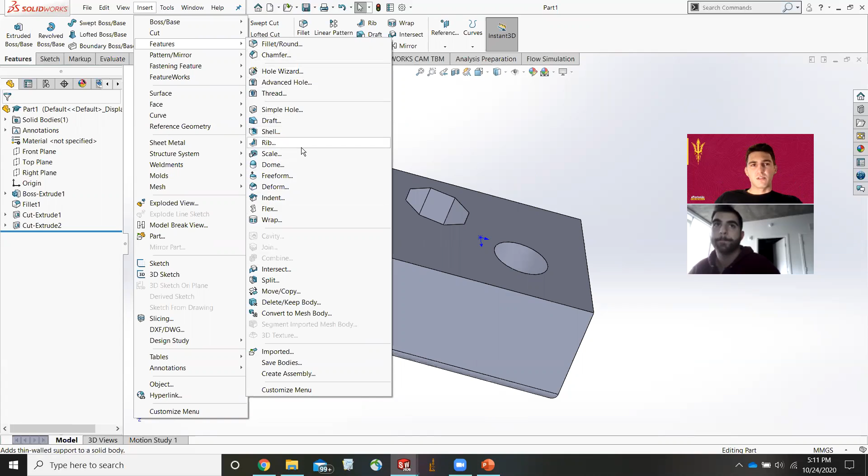But YouTube is going to be your best friend. This was kind of a starting point of where to go on SolidWorks, how to kind of look for things. And I'm not going in depth in too much. I'm basically going to be doing everything I just showed you today for making the injection molds, and then the flow simulation, which is different. It's different, but it's cool. It's really cool.